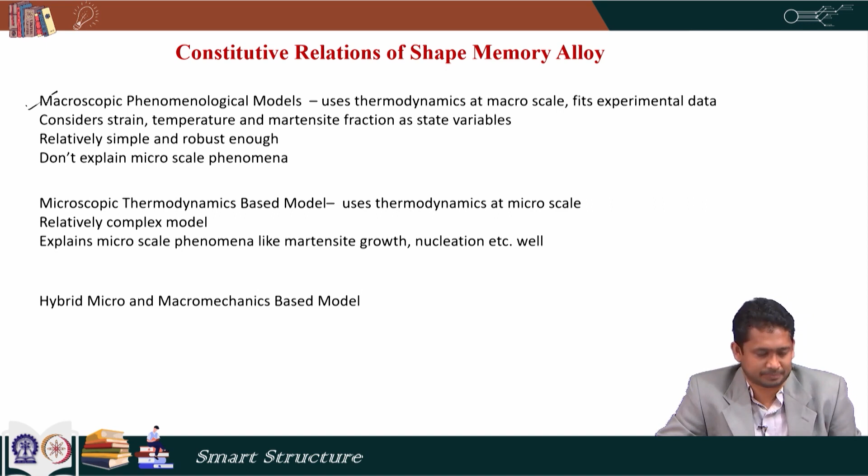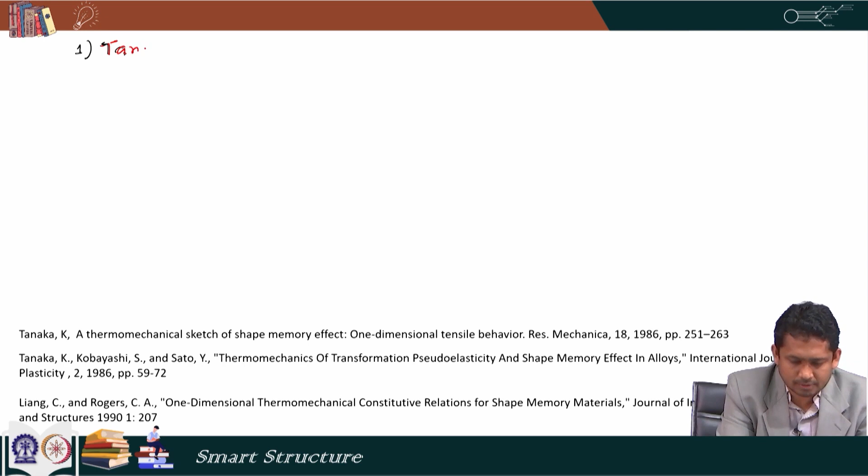So we will talk about three models which are macroscopic phenomenological models. One is the Tanaka model, then there is the Liang and Rogers model, and the third one is the Brinson model. So let us start with the first one, that is the Tanaka model.

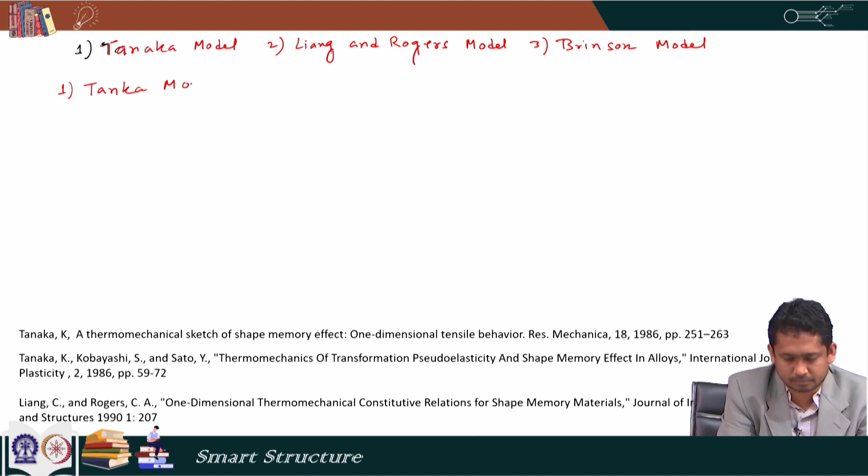Now, the Tanaka model is described with sufficient detail in this paper by Tanaka, 'A Thermomechanical Sketch of Shape Memory Effect, One Dimensional Tensile Behavior,' and also the other paper by Tanaka and his co-authors, 'Thermomechanics of Transformation Pseudoelasticity and Shape Memory Effect in Alloys,' which shows good details of this model. And apart from that, this paper by Liang and Rogers also talks about the Tanaka model with sufficient details.

Now, when we talked about the constitutive relations in piezoelectric materials, we restricted ourselves to small strain problems. So we made the assumption of small deformation and accordingly we could simplify a few things. However, in shape memory alloys, most of the applications involve large strain, because we have seen that a material like nitinol can expand up to 8% and it can easily recover that. So at that range of strain the problems are nonlinear.

However, a full treatment of nonlinearity is not in the scope of this course. Generally a course like continuum mechanics treats those things in full detail. Here we will look into those nonlinear effects very briefly, so that we can explain the models.

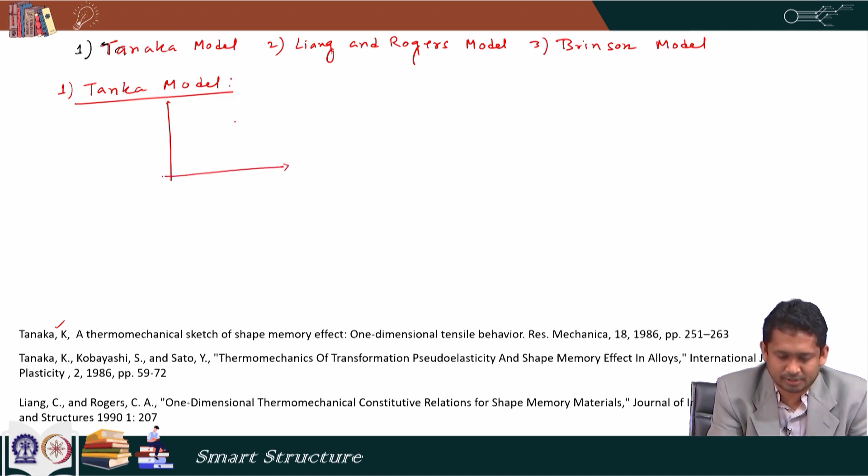So when we deal with large deformation problems, we talk about two configurations: a configuration which is before the deformation, and a configuration which is after the deformation. So this is generally called a reference configuration, and this is generally called a current configuration.

Now, if we have a point here in the reference configuration, and if this point has a coordinate capital X1, capital X2, capital X3 in 3D—please understand, although for simplicity it is drawn in a 2D plane, these bodies are 3D in general—then let us imagine that after deformation the same point has a new coordinate, that is small x1, small x2, small x3. In that way, each and every point has a corresponding unique point in the current configuration.

So we can say that x I is a function of the coordinate in the reference configuration as well as t, because with time the deformed shape changes, so small x1, small x2, small x3 changes. Now, with this we can define the matrix F, a 3 by 3 matrix, where F Ij is equal to partial of small x I by partial of capital X j, and this is called the deformation gradient.

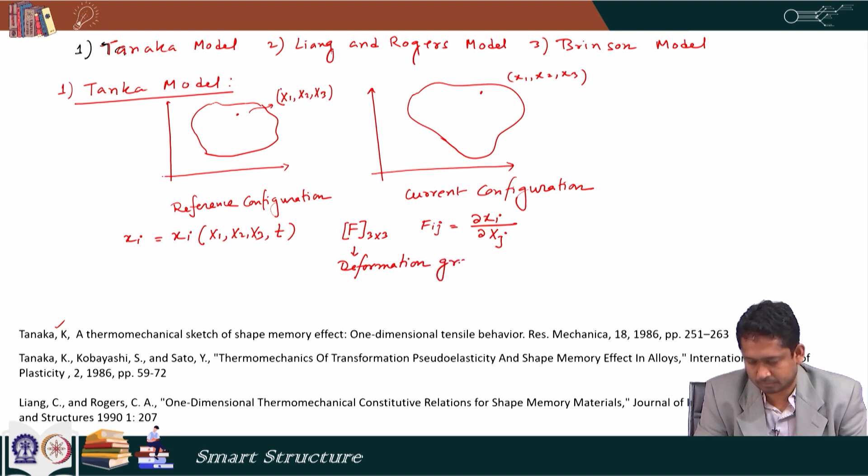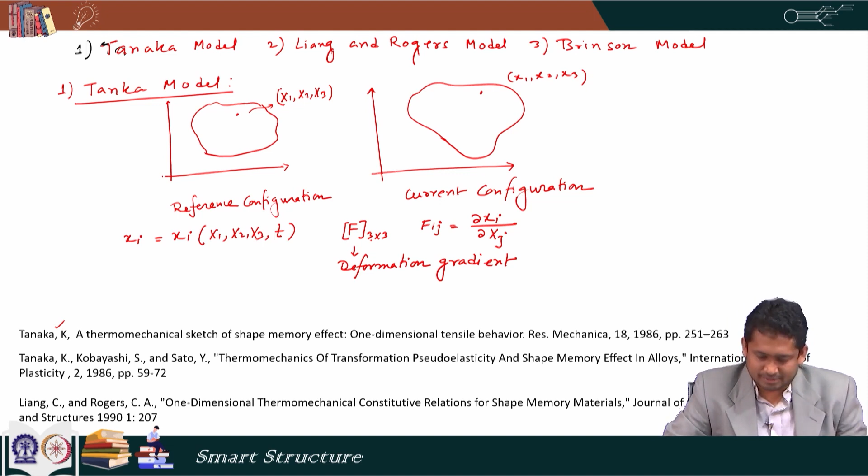Now, this quantity will be useful when we go to the constitutive relation, its derivation. The basic principle behind deriving the constitutive relation is the same. While dealing with piezoelectric materials, we saw that we write the Clausius-Duhem inequality, and in that inequality we use a suitable thermodynamic potential and apply all the conservation laws, and then using that inequality we get a certain form of the equation, and that equation form gives us the constitutive relation.

Same thing we do here. So, in Tanaka's model, the thermodynamic potential that is used is the Helmholtz potential, which is written as psi equals u minus S T, where u is the internal energy, S as we defined before is entropy, and T is temperature.

Now, if we write the Clausius-Duhem inequality for this case, it looks like this: sigma Ij minus rho0 multiplied by del psi by del epsilon Ij, multiplied by epsilon Ij dot, minus S plus del psi by del T multiplied by T dot, minus del psi by del xi multiplied by xi dot, rho0, minus 1 by T times q I, T comma I, which is greater than or equal to 0.

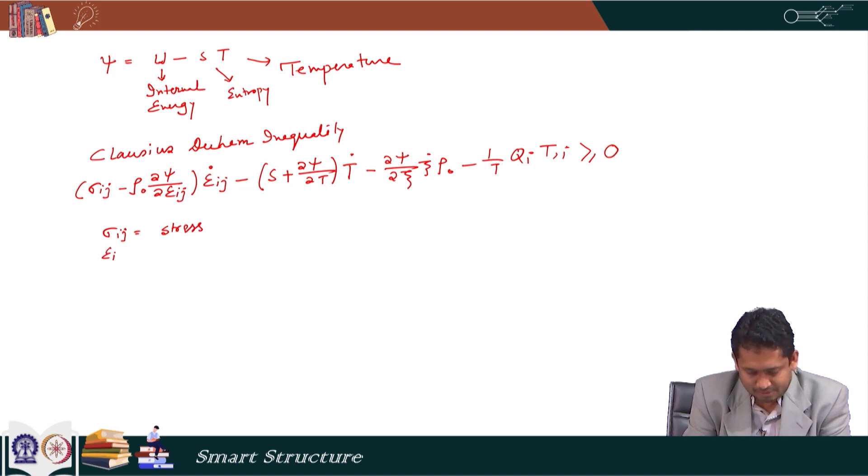Now, when it comes to large deformation problems, there are various types of stresses and strains, because our initial configuration and deformed configuration are significantly different. In this case, this stress is the second Piola-Kirchhoff stress, and this strain is the Green Lagrangian strain. Both the second Piola-Kirchhoff stress and the Green Lagrangian strain are defined with respect to the undeformed or reference configuration. So when you talk about this second Piola-Kirchhoff stress, the force or area are both taken with respect to the reference configuration, and these two are energy conjugates.

So not any stress is the energy conjugate of any strain. This stress, the second Piola-Kirchhoff stress, is the energy conjugate of the Green Lagrangian strain.

Now, we have other quantities like rho0. Rho0 is the density at the reference configuration, and rho is the density at the current configuration. So we can see that in this problem, we are using two separate variables for density, for the reference and current configuration.

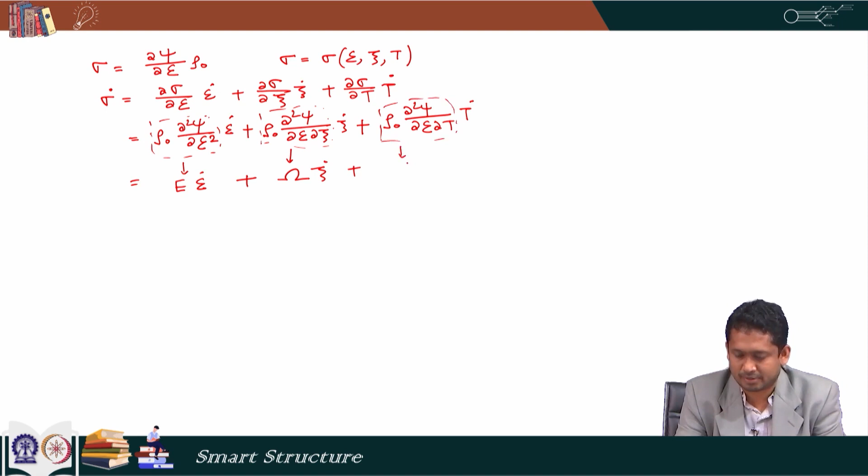Now, this quantity gives a material constant E, so we write it as E multiplied by epsilon dot. This quantity gives a term omega, so we write omega multiplied by xi dot. And then this quantity gives a term, maybe we can use capital theta, so capital theta multiplied by T dot.

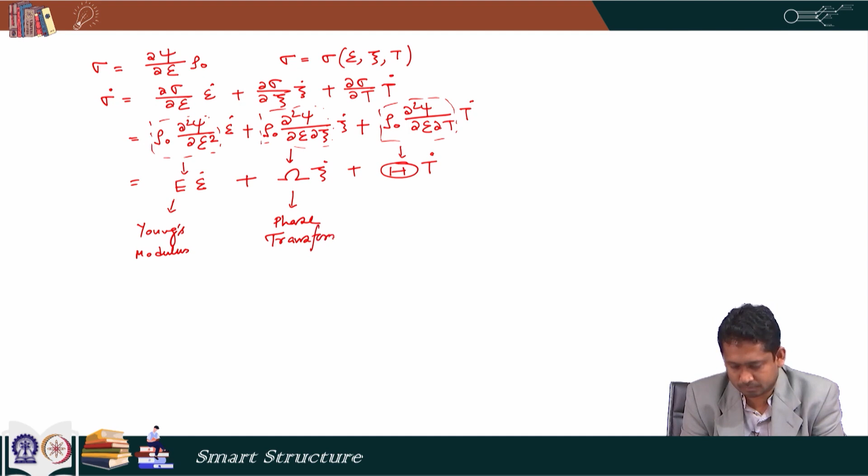So this is Young's modulus. If the material is linearly elastic, we can call it Young's modulus. It just says if my strain changes, what is the corresponding change in the stress. This is a phase transformation constant, and this is the thermoelastic constant.

Now, if we integrate both sides, suppose we are taking two time steps: initial time step T I, and present time step T F. In between these two time steps, sigma is changing, epsilon is changing, xi is changing, T is changing. So it changes from sigma 0 to sigma, epsilon 0 to epsilon, xi 0 to xi, T 0 to T. So we can say sigma minus sigma 0, the change in sigma, equals E multiplied by epsilon minus epsilon 0, plus omega multiplied by xi minus xi 0, plus capital theta multiplied by T minus T 0.

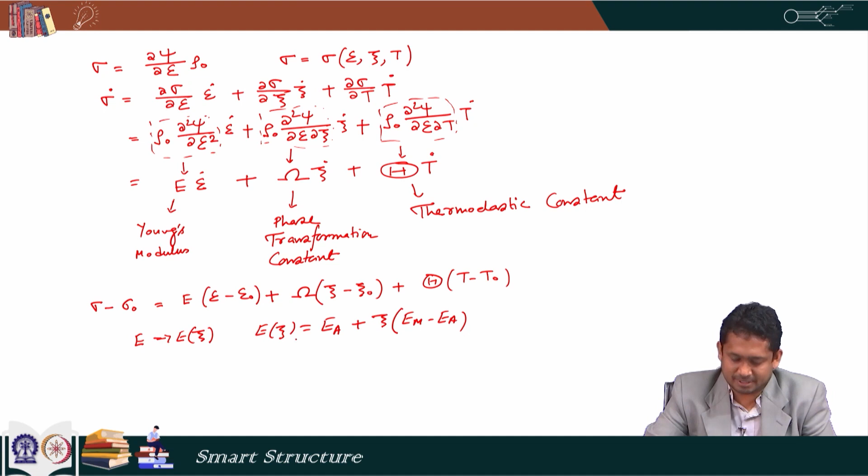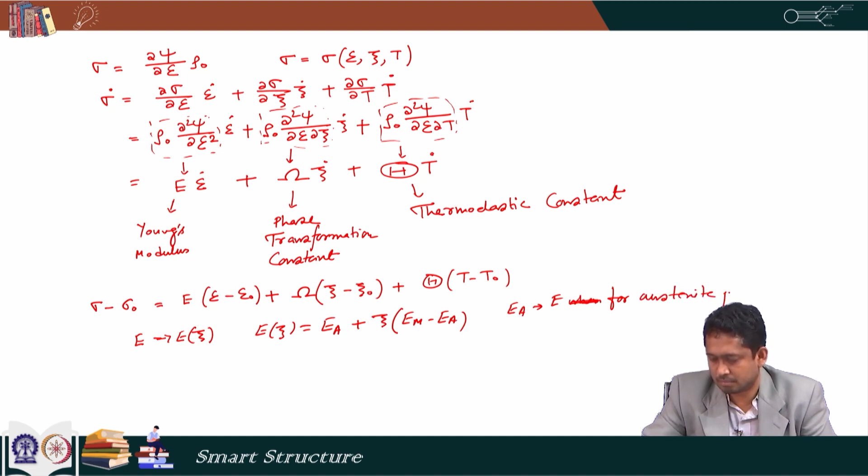Now, this constant E is in general a function of xi, because we know that E has different values when the material is martensite and when it is austenite. When it is austenite, xi equals 0 and it has a certain value of E, and when it is martensite, xi equals 1 and it has a certain value of E. So we can say E as a function of xi is E A, which means E at the austenite phase, plus xi multiplied by E m minus E A. So we are using a rule of mixture here. At any point of time, the material can have a certain martensite fraction, and based on that fraction, the effective E is given by this relation, where E A is E for the austenite phase and E m is E for the martensite phase.

Accordingly, theta can also be defined as a function of xi using the rule of mixture. Theta can be different for austenite and martensite phase, and accordingly the rule of mixture gives theta as a function of xi. Now, although E is a function of xi, in many cases, especially in these models, we will sometimes assume them to be constant to derive a few relations.

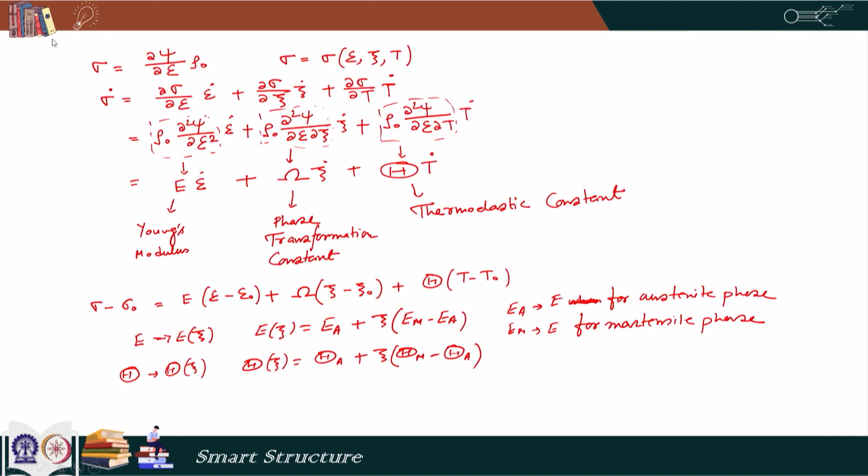Now comes omega. Omega is less than 0, and this can be proved using some simple logic. Let us say that it is transforming from austenite to martensite. During this transformation the stress is constant, we are keeping the material free, so there is no stress involved; it is a purely temperature driven transformation.

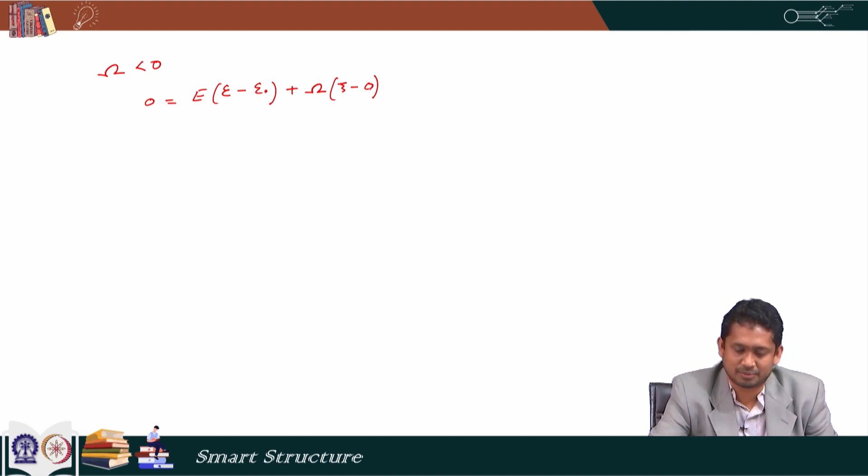So if you write the constitutive relation, sigma minus sigma 0 equals 0, and during this transformation strain changes, that is epsilon minus epsilon 0. Epsilon 0 may be an initial strain during the austenite phase, it can be 0 also, then plus omega multiplied by xi minus 0, because initially in the austenite phase xi was 0, during transformation at some point we have xi, and when transformation completes it becomes 1, plus we have the theta term. Now, the effect of that theta term is generally much less than the effect of these two terms, so the strain due to temperature is generally much less than due to the other quantities. So we are not writing that, and even if you write it, whatever contraction is there due to reduction in temperature is much less than the expansion due to the phase transformation, so we are not writing that.

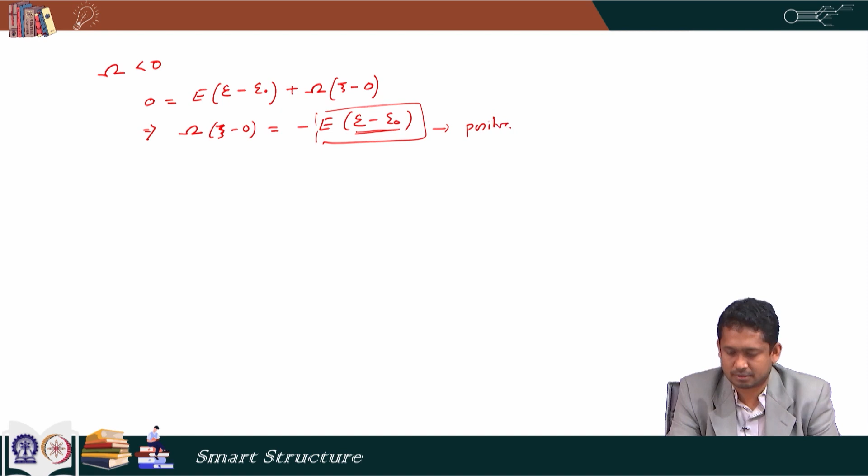So we can write this same quantity as minus of E multiplied by epsilon minus epsilon 0. Now, temperature is reducing, it is becoming martensite. When it becomes martensite, it strains, so it expands. This means this quantity is a positive quantity, and E is also a positive quantity, so it is a positive quantity, and xi is a positive quantity. So that tells me that omega is a negative quantity. So omega is negative, and omega is also related to the Young's modulus using this equation.

Now, we are not going to discuss this in detail here. Later on, when we talk about the Liang and Rogers model, we will talk about this relation in more detail, because that is written in the paper by Liang and Rogers. So this was the first part of the constitutive relation, where we related stress change with strain change.

Now we already have a relation that relates stress change with strain change, martensite fraction change, and temperature change. Now we need one more relation which relates the evolution of xi, the change of xi, with stress and temperature. Last week we already worked on that and derived some relations based on cosine functions, but that is not used in the Tanaka model. In the Tanaka model, the change in xi is related using an exponential formulation. So for austenite to martensite transformation, as per the Tanaka model, xi as a function of sigma and t is...

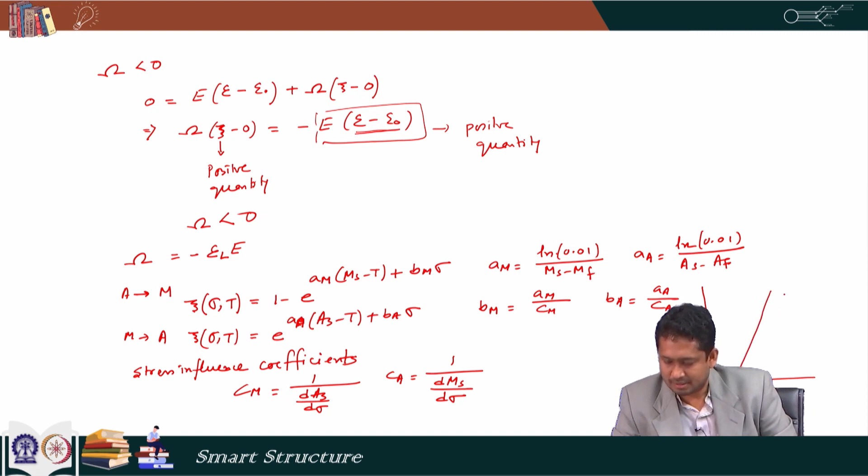So, if you look at the phase transformation diagram that we drew before, in the sigma-t plane, this is t and this is sigma, and we have the slope of these lines As and Ms. So, dAs by d sigma is just the slope of this line, and dMs by d sigma is just the slope of this line.

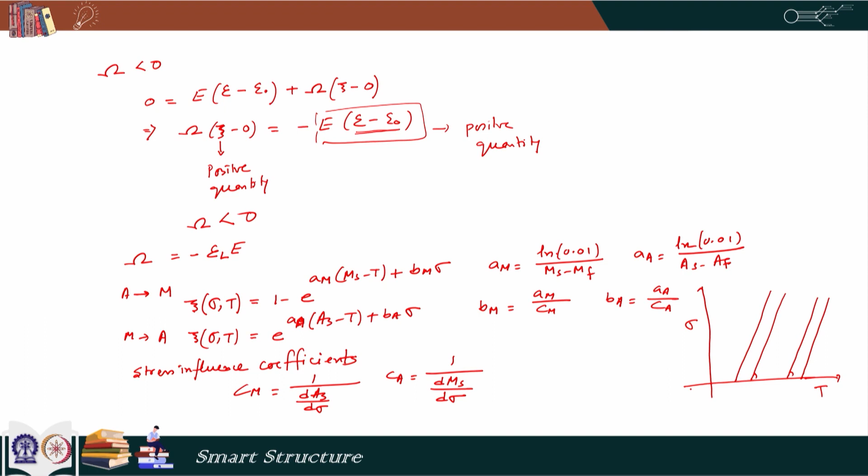Now, we will look into a phenomena with some simplistic point of view. So, let us assume E is independent of xi, so it is constant. That is a big assumption because we know that Em and Ea are quite different. However, sometimes these assumptions help to derive few things, and these assumptions you will find in the paper by Tanaka, the second one that we listed at the beginning.

So, if we assume that the material is austenite at the beginning and then gradually we are increasing the load, gradually it is being loaded, so the stress strain curve is following a linear fashion. When the transformation starts, the slope changes, and then after the transformation, after it is fully martensite, it again follows the same thing.

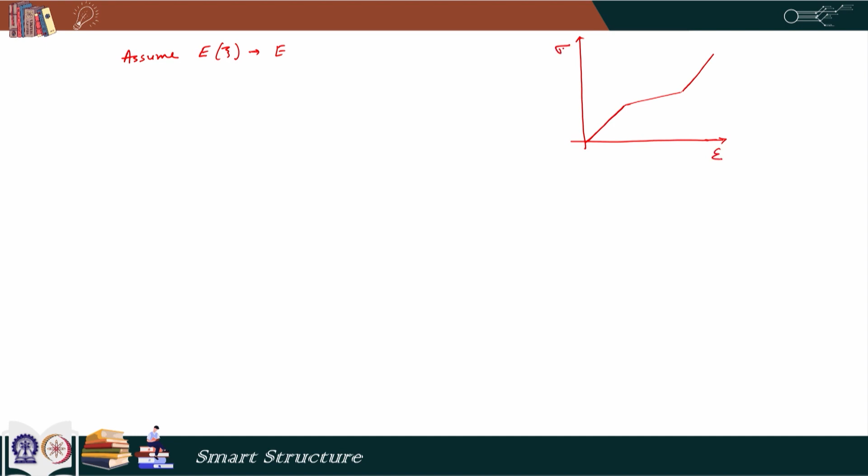Now, from here, if we write, if taking this as the starting position, if we write the constitutive relation here, we can write delta of sigma is equal to E multiplied by delta of epsilon plus omega, that we are writing when the transformation has finished, so xi has become 1. So, from here to here the change in sigma is sigma minus sigma zero, which is delta sigma.

From here to here change in strain is delta epsilon, and from here to here change in xi is 1, because here transformation just started. So, xi was 0, here transformation finished. So, xi is 1. So, that is the relation. So, we can write delta of epsilon equal to delta of sigma divided by E minus omega divided by E.

So, graphically this quantity is my change in strain. So, that is delta of epsilon, and if we draw the line and extend it, it intersects here. So, we can show it here maybe. So, this quantity, and we have two different quantities, this quantity and this one.

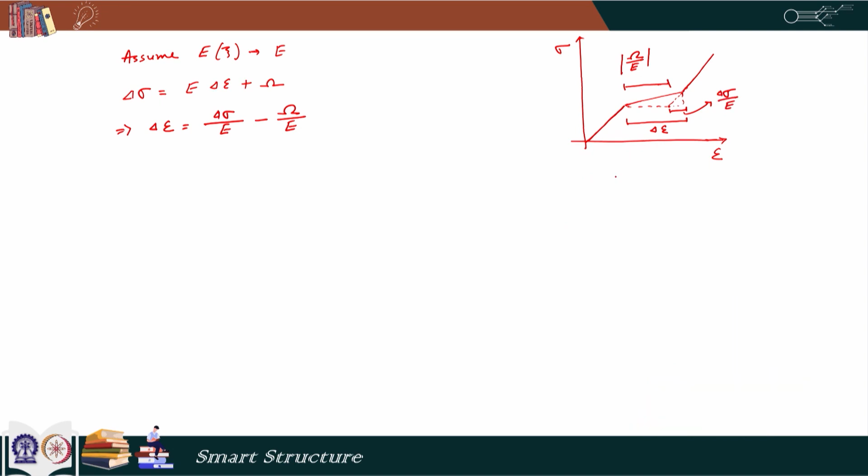Now, this quantity is omega by E and its modulus, and this quantity is my delta sigma by... So, we will look into these things in more detail when we talk about the next model, that is the Liang and Rogers model.

Now, again to summarize, this model started from a thermodynamic potential which is the Helmholtz potential, and then using the second law of thermodynamics with other conservation laws, we got the constitutive relation. In this entire derivation we have two relations: one is the relation between the change in stress with change in strain, change in martensite fraction and change in temperature, and there is another relation that shows the evolution of xi with sigma and t. With those we can solve problems related to shape memory alloys.

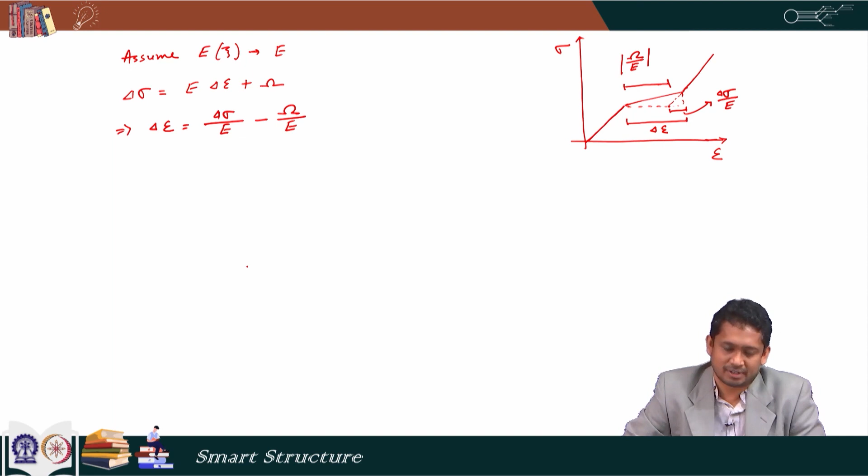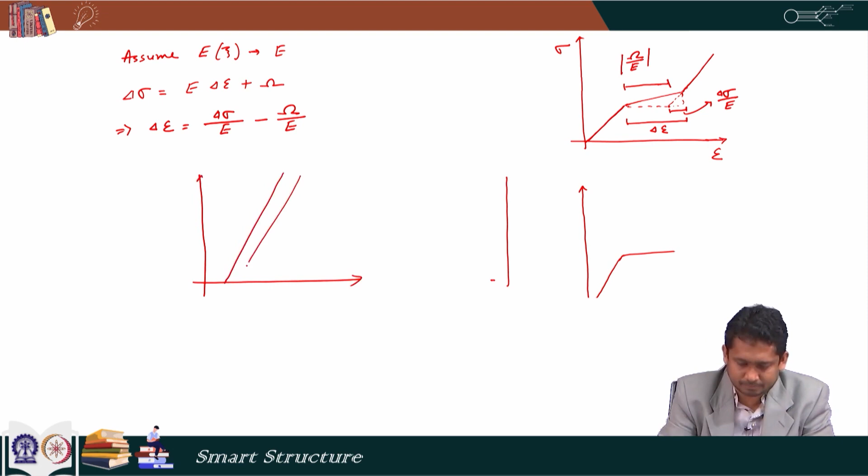Now, here one big thing that is missing in the model is that it does not take care of the stress and temperature induced martensite separately. So, in the phase diagram we had this: as we know this is the austenite zone, this is the martensite zone, but in the martensite zone as we increase the stress, the material is supposed to detwin. So, it is supposed to transform from temperature to stress induced martensite, but those things are not taken care of in this model. So, that is a limitation.

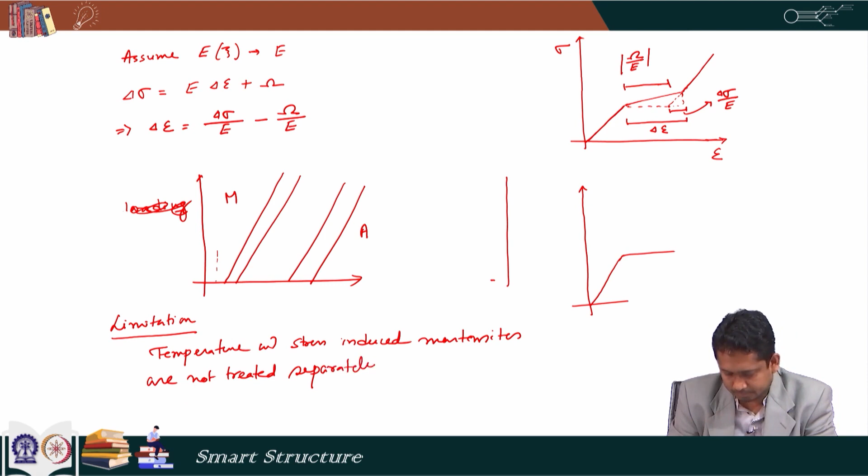So, the limitation is that temperature and stress induced martensites are not treated separately or differentiated. So, later on when we see the Brinson's model, we see that there is an effort to overcome this limitation. So, with this I would like to conclude this lecture here. Thank you.